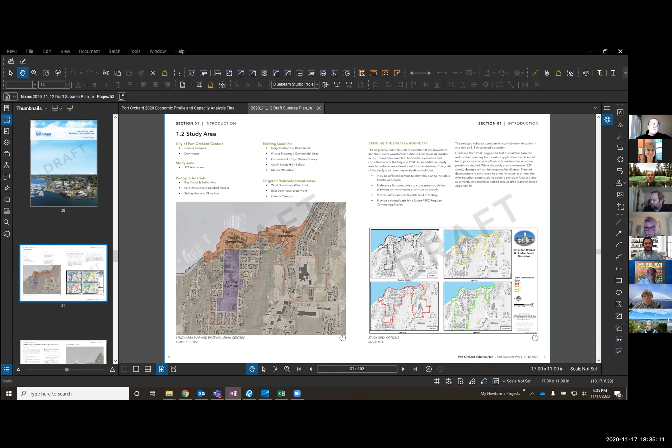And then in consultation with PSRC and city staff, we essentially came up with a few different scenarios that would get us to the area requirements, trying to capture where we thought development might occur and where we might capture the most activity units prior to getting into the full study of the parcels in the land. And that's what you see here, the different study options we considered.

PSRC had recommended that it's best at this point to look at a broader brush stroke to the study area, and that if the city does go in with an application in the future based on the sub-area plan, it's easier to defend a reduction in the study area than try to expand the study area for an application to an area that wasn't studied. So that said, we ended up on the study area.

If you can see this in red here, I'm following with my line. The outline is about 329 acres, and it encompasses the existing county campus and the existing downtown campus. And we'll discuss these other colors a little bit later in the slides.

But what you're seeing down here at the bottom highlighted in red then is the existing population within this larger boundary, about 1,800 residents, almost 2,200 jobs, again, the 329 acres, and the existing activity units is only at 12 in the existing condition.

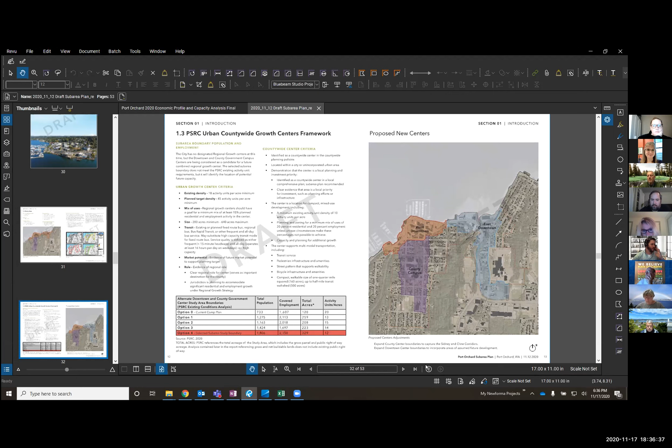So where will the development occur within the sub-area plan was one of the first initial tasks we looked at, and we leaned a lot on this report that was sent out previously, conducted by Heartland. And what we did is we looked at each of the parcels within the area and determined what are the existing gross developable lands, or what's our capacity for development.

And that really looked at primarily three things. What's the vacant land, what's underutilized land, and that was really the ratio of improvement to the land value, looking at assessor's data for the some 780-ish parcels, I believe, in the study area. And then the other is looking at where there are single family homes within larger density

allowable zones. From there, it was adjusted based on critical areas, future anticipated road right-of-ways or driveways, and a small percentage that was assumed just would not be developed within this planning horizon timeline to 2040. From there, we arrived at essentially a square footage of land that was assumed to be our net developable land where that future development may occur.

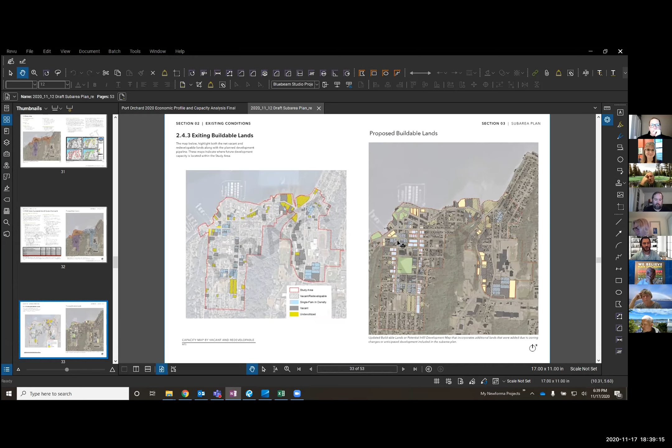So moving on from there, part of the sub-area plan is we are also including a programmatic EIS to look at the environmental impacts of this proposed new development, and the three proposed alternatives that are being considered take more of a programmatic approach to this development. This is due in part to the uncertain scope of future development, and also the large study area of the boundary.

And of the three alternatives being considered, alternative one, the no action alternative, essentially doesn't assume that no development will occur, but rather that development will occur outside of the proposed policies included within the sub-area plan, and that would most likely occur similar to the existing conditions within the study area, largely more single-use development with largely surface parking.

And then the two alternatives being considered are alternative 2, which is a residential focus, which includes a higher percentage of residential and most of the commercial occurring in standalone commercial development with a higher percentage of surface parking than alternative 3. Alternative 3 is assuming a little bit greater structured parking overall, and it's also assuming more mixed-use development within the study area. So, for instance, ground level retail commercial uses with office and residential above.

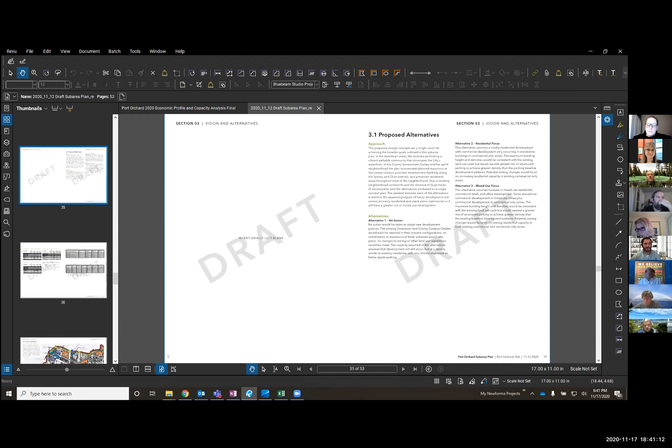So starting out looking at the redevelopment areas, we generally broke them down somewhat based on the existing centers, but also on the buildable lands analysis map and the geographic conditions of the downtown. And so starting out with the west downtown area, some of the big goals that we're proposing for this area are, one, a Bay Street corridor plan to identify proposed frontage design and streetscape standards for future development that would occur along Bay Street within the entirety of the study area from Port Orchard Boulevard through to the end of the West Bay Center. And also recommendations for the existing marquee in the historic downtown area.

Additionally, how can we better activate the waterfront? In many ways, the development right now turns its front face to Bay Street and its back to the waterfront. And how can we propose development patterns that allow the Sinclair Inlet to be more of a front door for the city? And also, how do we better improve connections to the waterfront, including pedestrian connections from Bay Street, uphill neighborhoods, Prospect Street down to the waterfront.

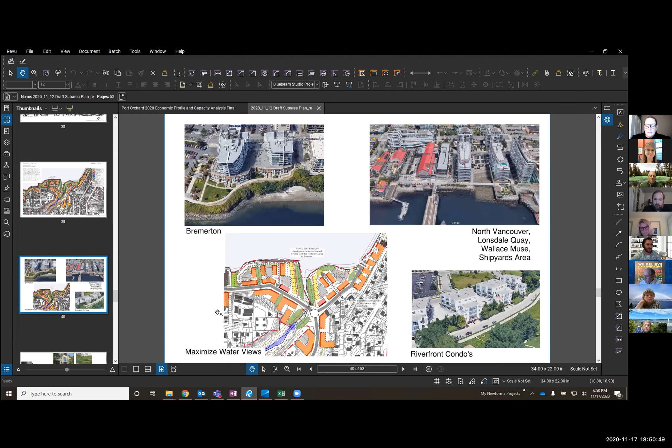And then just some suggested imagery, precedent imagery of what the outfall of Blackjack Creek might look like. Again, looking at potentially more of a natural type landscape with the idea of potential boardwalks along the waterfront, and then in front of the buildings you would have more traditional stoops and building entries that all are anchored looking at that view.

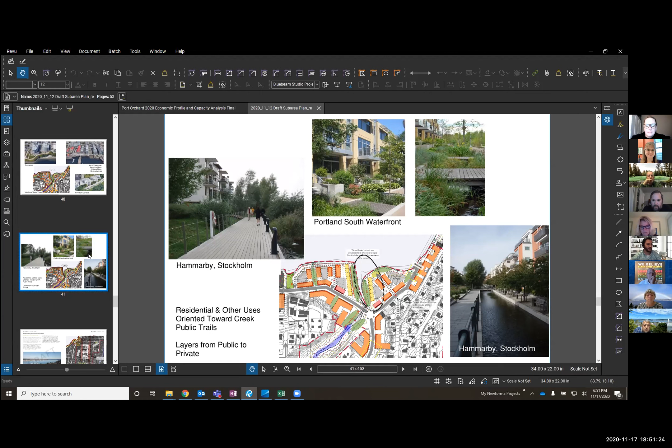For the county government campus, there isn't a lot of land that was included within the capacity analysis in this area. And what we're really striving to do with the goals of the sub-area plan is to support the planned expansion of the county government campus as a strong job center for the area, and then encourage some new development along the Sidney and Cline corridors, consistent with the comp plan, that new development does occur along existing corridors,

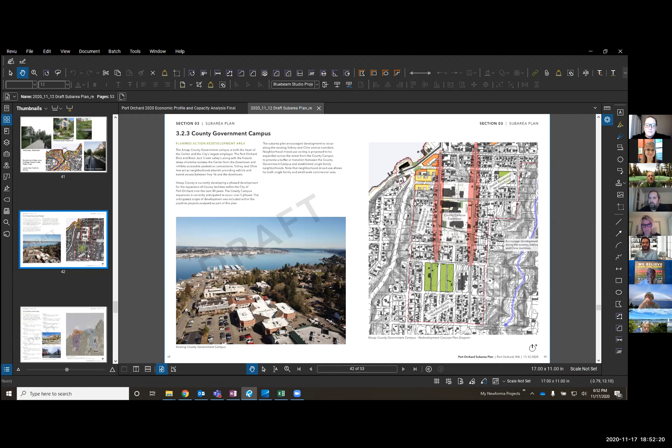but then also have that development act as somewhat of a transition or buffer between the larger scale development at the county campus and the stable single family neighborhoods further to the east and west from there. And really, how do you have new development while also trying to preserve some of those stable single family neighborhoods?

So looking at some of the land use suggestions, first on the right here, this is the proposed adjusted centers map. And so adjusting the county campus center to include more of that proposed developable lands, and also plan not just for the center of the streets, but the way that you actually experience neighborhoods is both sides of the street at once. And so capturing either side of Sidney and Cline Avenue as part of the planned center area.

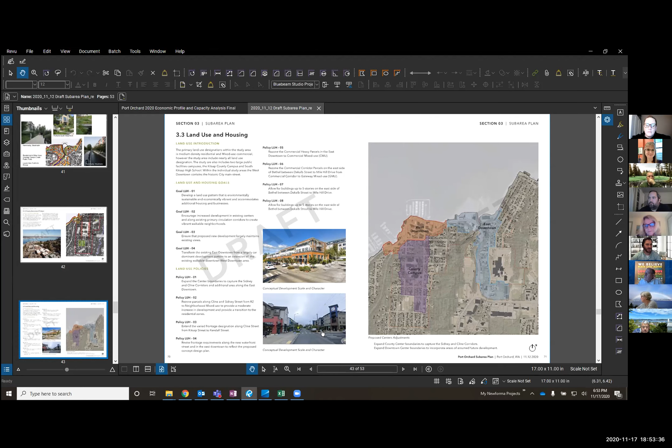And then largely in the east downtown, much of the proposed development lands are along the Bethel corridor and the South Kitsap High School. And so incorporating that portion of the study area within the center as well. And again, you're seeing a couple more precedent images of the scale of proposed development that might be included within the plan.

Suggested frontage revisions, expanding some frontage requirements from the existing land use code, extend from Sidney corridor, which a portion of it doesn't have frontage requirements and a portion of it is landscaped, and allowing for more varied frontage requirements along that entire Sidney corridor. And then a similar case, extending the frontage requirements on Mitchell Street and down to the waterfront, as you see here. The proposed new Loop Street and Waterfront Street in the East Downtown.

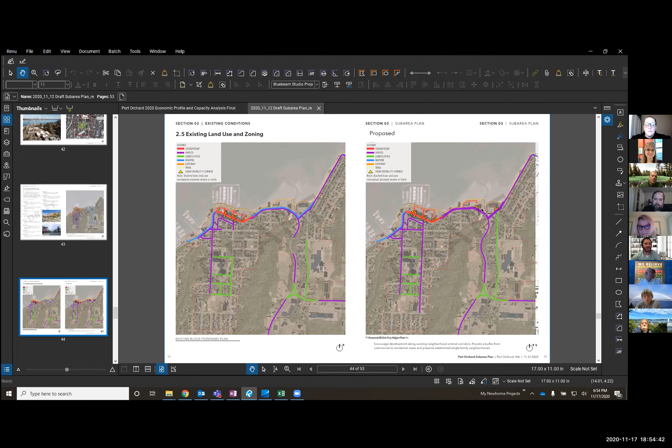And then proposing for Bay Street to have more of the same character of development, going from a marine frontage to a varied frontage along Bay Street, which would require essentially a larger portion of the street frontage to be held by building development.

We did include some minor proposed suggestions to land use changes. And again, that was to reinforce the Cline and Sidney Avenue corridors. And so what you see here dashed, those are the parcels that are suggested for changes to the land use. And so going from, right now there's pockets of neighborhood mixed use along Sidney and Cline, and just going to more strongly reinforce those corridors, proposing neighborhood mixed use along the extents of each side.

And again, neighborhood mixed use still allows for single family zoning, which exists in much of the area, but it also does allow for small scale commercial as well. And that already exists along many of the parcels across from the Kitsap County campus, and wanting for there to be more of a transition from that tall, high scale development of the county government campus, transitioning to the more single family neighborhoods away from Sidney and Cline.

And then at the East Downtown, proposing from heavy commercial to commercial mixed use at the existing Kitsap Ford, and then Gateway mixed use along the Bethel Avenue corridor. In a couple places we've heard from the public a lot of concerns about maintaining existing view corridors to the waterfront and ensuring that development not inhibit those views.

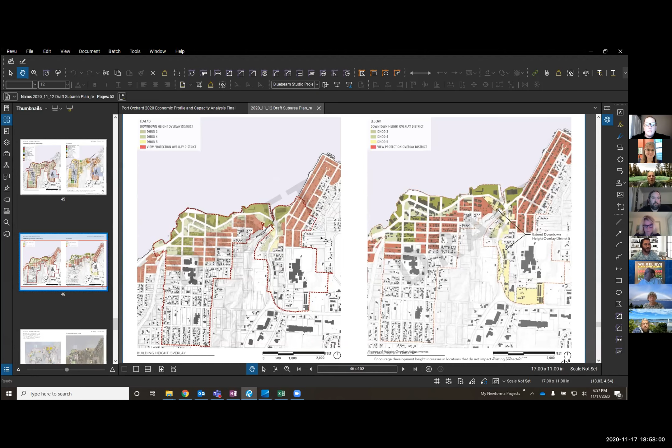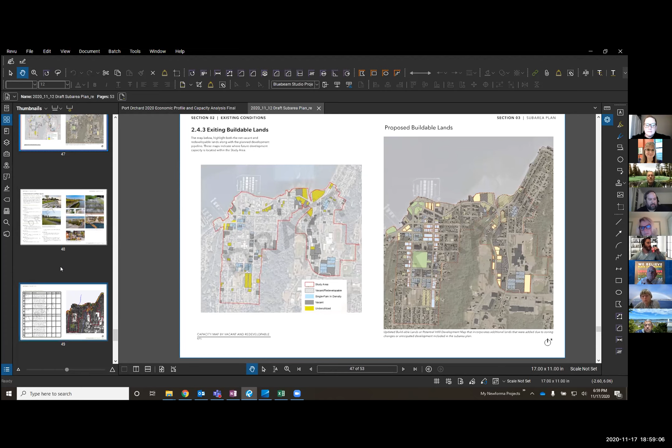About time there, Nick, and thought this would be a good stopping point and allow for questions. Yeah, absolutely. I don't have much to add to Mitch's presentation, but I will let the council members take it away with comments or questions.

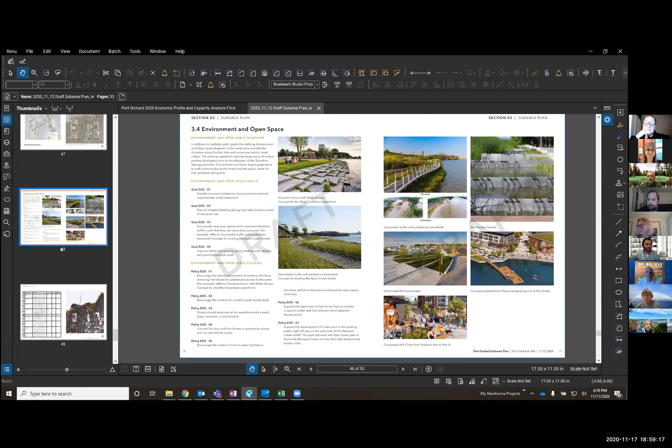Go ahead, folks. Could you turn back to page 71? I don't have a header on. It's, yeah, that map on the right. Yep. Okay, a couple things struck me about this map. I understand the need to, as you say, buffer the height of the county campus buildings against the single family dwellings. I am concerned about the expansion of the county campus area west on Cline and east on Sidney,

because you may not be aware, but that area there that you're suggesting for up development has a lot of the historic homes in town. And so it'd be really ironic if we're protecting the single family houses on the right from the overwhelming architecture of the county. And I think it was this map that also made me realize that the county should not be encroaching on the city so much. They should be an employer. They should not go so far.

And I realize you didn't make the boundaries here. It looks like it stops at Kitsap Street between the Purple and West Downtown. But that boundary gave me a lot of heartburn because that is a prime residential area. I know that property tax is not a concern of everyone because we get more of our revenue from sales tax, but if all that purple area became county grounds, we would be potentially removing property from providing property tax.

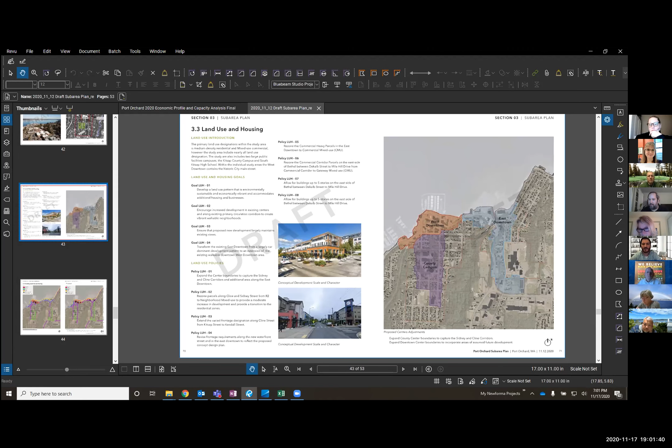And Councilmember Chang, I think that the county campus label we really meant to divide the center into 3 areas based on topography, not based on who's using the land. And so I think this is an issue of we've labeled this county campus, but the county's actual footprint is much smaller than the purple area. We're just calling the area the county campus, and so perhaps we need to call it by a different name.

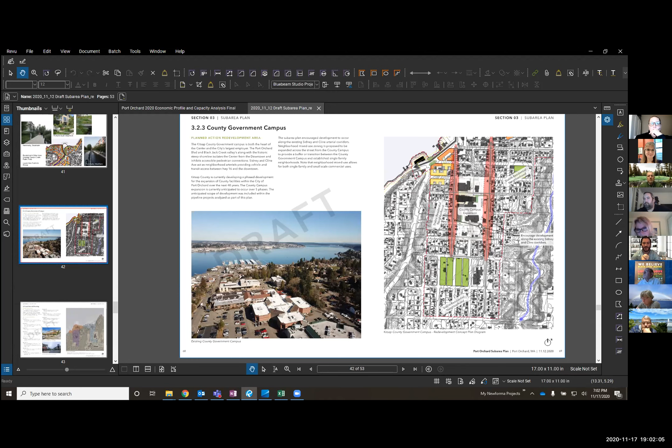Yeah, and some part of that comes from the existing comp plan where I think it's identified as the county government campus center, something along that line. And so the existing county campus is not planned to expand, but rather the study center as identified in the comprehensive plan is expanding, not the actual county campus.

So this is Scott. I would support a second look at how we label that and also how we show what we're currently calling the county campus and how that extends down the hill to the north. And it seems like a better break would be a little further to the south than it's currently shown, like I think Fred is referencing. Maybe Dwight Street, if not Division.

I think Dwight makes sense to separate downtown. Yeah. And also just north of Dwight Street on the corner is I think a parking lot that the county uses. So Dwight Street might be a good logical break.

Councilmember Cucciardi, you had your hand raised. Yeah, Nick, I was just going to go back to your opening comment as it relates to the PSRC. Do you want to just kind of talk about the pros and cons of what that would look like and kind of what you're looking for us to weigh in on?

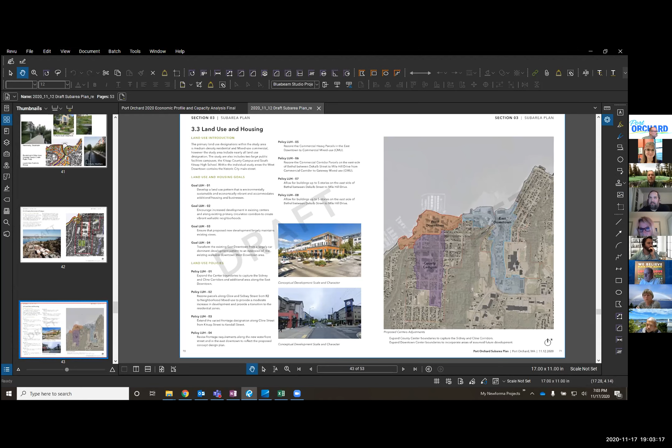Yeah, so I think somewhere in the plan, and it's going to take me a minute to scroll to that page because I'm viewing it in a browser, it talks about the 3 alternatives and what alternative 1, 2, and 3 look like in terms of planned activity units. The highest of the alternatives is alternative 2. I believe it's 26 activity units per acre. And we're currently, depending on where you draw the boundaries, anywhere from 12 to 18 activity units per acre.

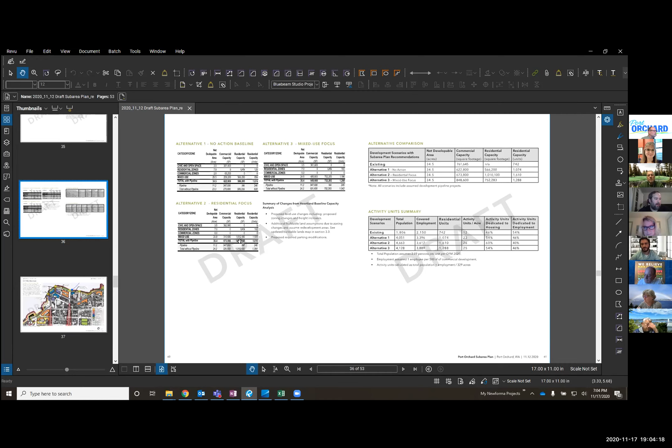So with this plan, what we've realized is a lot of this is redevelopment. There are existing activity units and there's a net increase, but we're not increasing the activity units that significantly. And I believe that we have to plan for 45 activity units per acre over an area that's at least 160 acres. To get there, we would have to either have significantly more height or be upzoning significantly more area or showing some of this redevelopment in more areas of the city.

And based on the comments that I've heard about preserving the existing residential neighborhoods, I just don't know that there's support from the community or from the city council to do that. Right.

Councilmember Ashby. Sorry, I lost some network access for a bit, but I believe this is the table you're referring to, Nick. As you see here, each of the alternatives, we're looking in the range of planned activity units more in the mid-20s. So it's a significant jump to get to that 45 activity unit number. In our discussions with Nick and city staff, it seems as though there's not public support to go to the type and scale of development that would be required to get that. Seems like a non-starter.

Yeah, right. And to elaborate on that, go ahead. What I would add is I don't see a need to become a regional center. One of the conversations with that is that we would be more likely to get regional transportation funding, and I do not think that that would happen. I think designating this as a countywide center is appropriate for us.

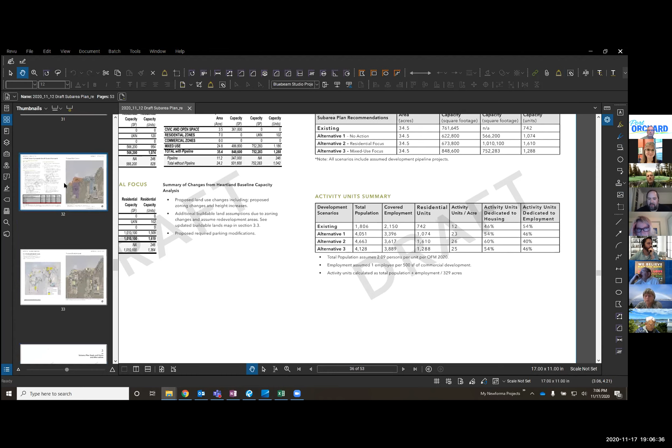Right. And so what I was going to add to that is PSRC has a minimum existing activity unit number to be considered as a regional center, as well as a planning target. When we were considering, we're close to meeting the existing number. It's showing right now that it's 12 units per acre, but that's because we've expanded the boundary so much to include up Mitchell towards the high school. When we originally measured, we were closer to 18 activity units per acre, so we were seen as being close to the intensity to meet the standards.

But once you add the planning targets to that, it really transforms Port Orchard. And I think that's probably something that we don't have support for at this time. Nope. Yeah, I don't like this.

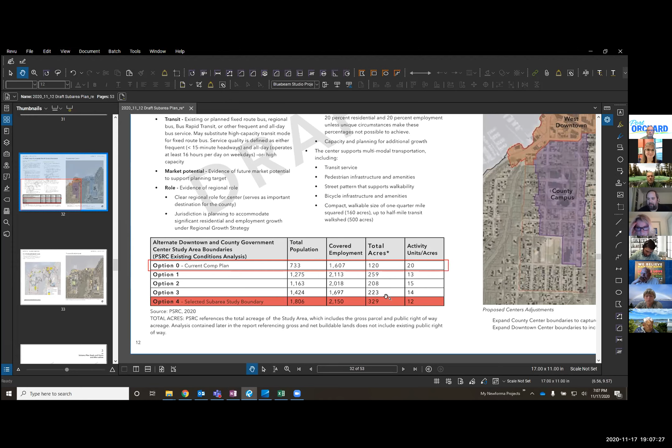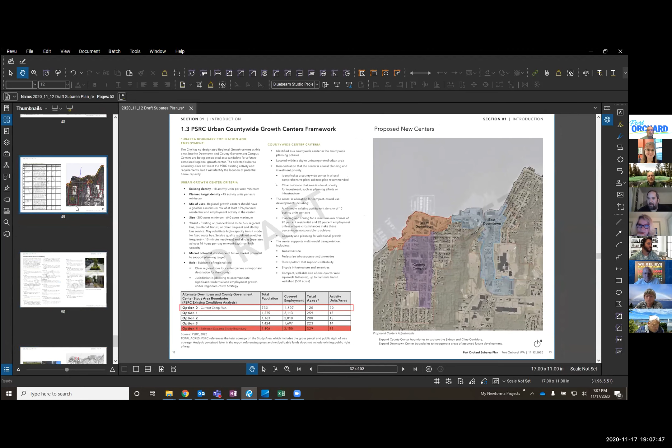So one other thing I wanted to mention in terms of implementation: Mitch touched on some zoning changes along Bethel to allow a little bit more height in those areas. But another thing is we're updating the parks plan at this time, and we've identified plazas at every street that terminates in the water, trying to transform them into more of a pedestrian space and providing access to the waterfront. If council is supportive of that idea, I need to make sure that I'm building those projects into our park impact fee, so new development is actually helping to pay for some of the redevelopment of the waterfront downtown.

And likewise, the transportation projects, we're talking about block frontages and doing some non-motorized improvements on Bay Street. We're going to have to do this next year, but it can't be part of our traffic impact fee now. I think we should consider putting some of the transportation pieces of this into the city's traffic impact fee, so that it can also help fund some of this as development is occurring. So I want to make sure that council is comfortable with that as an implementation step once we get this plan adopted.

So if we don't care for some of these boundaries, are they going to be adjusted in the plan? Or where are we at with this right now? You're asking us to decide on these options. What if we don't like any of them?

Well, so where we're at right now is this is a preliminary draft plan. So we are going to be releasing this to the public and doing some additional outreach. And there's going to be a hearing, I think, on the plan, or at least an opportunity for public participation in January. Is that right, Mitch? I don't have my schedule in front of me. And so there is absolutely an opportunity to make changes.

But when we talk about the alternatives, are we really going with more of a balanced approach where there's additional employers and commercial jobs space created in Port Orchard, or are we leaning more towards residential development to help bring the critical mass of people downtown to support a thriving commercial district 7 days a week? And so the alternatives that we're looking at are really, are we aiming for this balanced mixed use approach, or are we looking at a residential focus?

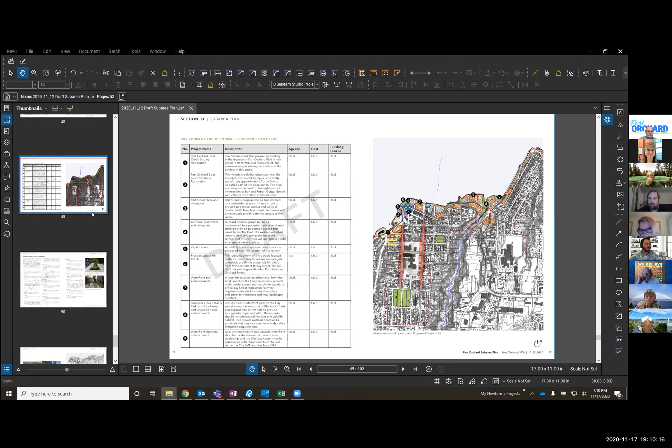And really changing our downtown so that you can actually sit on the sidewalk in front of a business and eat outside on the water side of a building is a transformational change that I think we're probably closer to the mark in that west downtown area compared to the other areas, which are much more conceptual right now. Mhm.

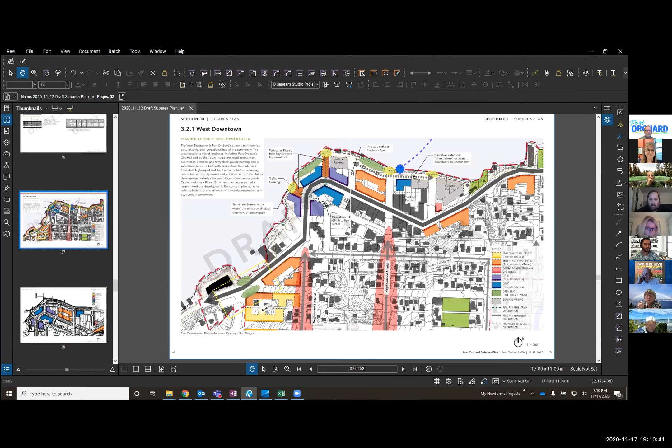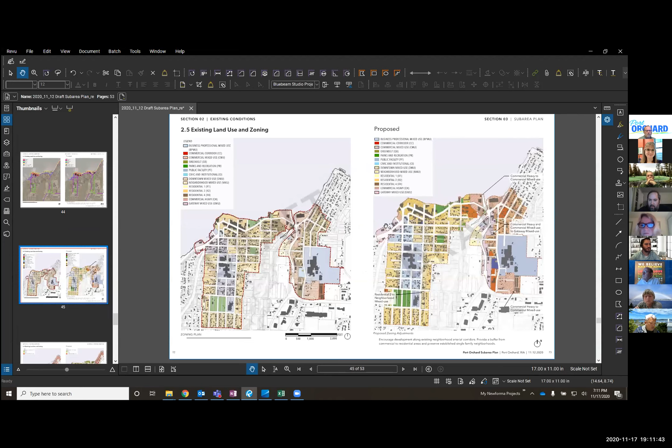So it's mainly the Bethel corridor where he's got these cross-hatched areas where we've got some commercial heavy where the gas station is and where the car dealership is, and we're proposing to change those. And by the way, we have met with Mr. Titus about this, and he said point blank he totally understands that the highest and best use of that property is not for selling automobiles, and that he's interested in moving to another. So he's supportive of the zoning changes in that part of downtown.

Thank you. The other piece of this that I think is potentially going to be really a hot button issue with the public is parking, as it always is. And so with that development between Harrison and Frederick Street, some of the existing parking where we currently have 2 rows is going to become more of a street with 1 row of diagonal and then a row of parallel parking.

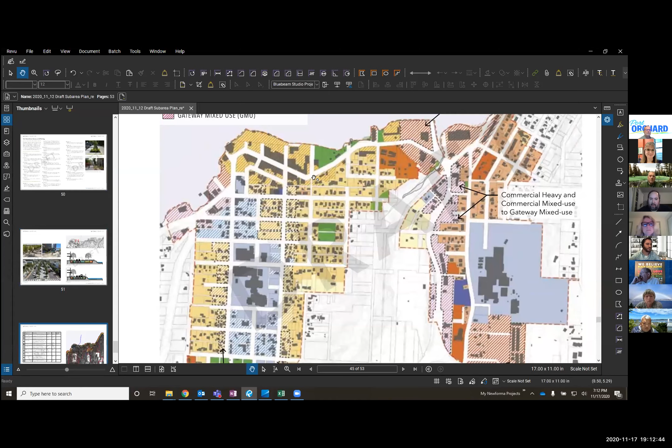And that's partially offset by the proposed structured parking at the site where the stair climb is across from City Hall. But it's also, I think, part of the mitigation has to do with Kitsap Transit and the existing more long-term parking for all-day parking would be available for a different type of parking. And so I think that's part of this conversation, and the timing of how those changes actually occur is really going to depend on the pace of development and also the presence of new park and ride facilities elsewhere in the city.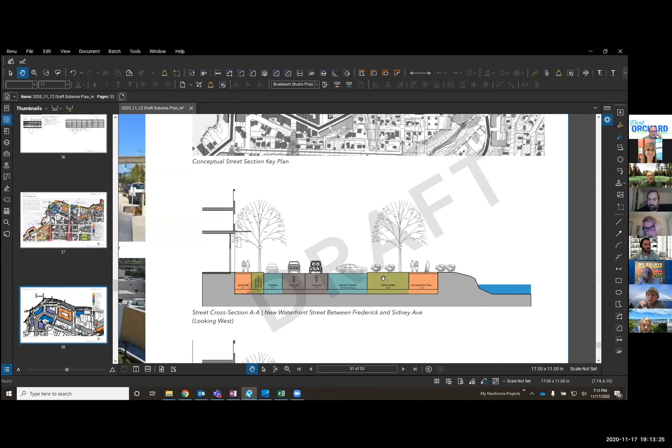A question I have is not the west side of town, but we've had several studies before, several plans. But on the west side of town, with the map that's up right now, we know that there's a potential for implementation of this on that section. When we go to the east side of town, we're completely offering an idea that the Titus site would be used completely differently than it is now, and also the West Bay Shopping Center site. So my question is, do we really feel that there will be movement in those areas? I mean, do we believe that the plan will actually be implemented?

Well, I would answer that, I guess, in 2 parts. First of all, the proposed planned action EIS is going to complete the environmental review for the first, I'm not sure whether it's 1,200 units of housing and 500,000 square feet of commercial space, but we're going to pre-approve under SEPA a certain level of development. And so it's going to be available on a first come, first served basis.

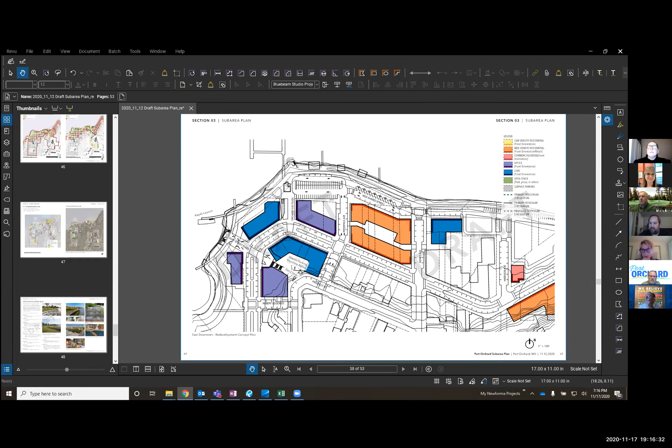I think I would just add one more point to your earlier comment about the east area downtown. There are a couple parcels, I'm forgetting the name of the parcel off the top of my head, but across from the gas station. 100 Bethel. Yeah, so that's a property that is potential for development in the near term. But the other point here is just to reframe all of ourselves that we're talking about analyzing this to a 2040 horizon. The redevelopment would be in the next 20 years.

So I was going to say at this point in time, I was wondering if there's other comments from the council members, and then Nick, I was going to let you summarize and say what are the next steps. Well, I'll answer Scott's question first. It's a little over half an acre that we lease to Titus. And that's not including the easement that we have or the portion that's occupied by the trail.

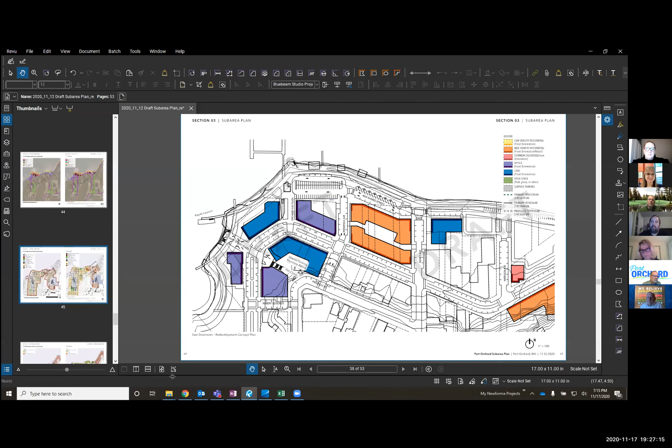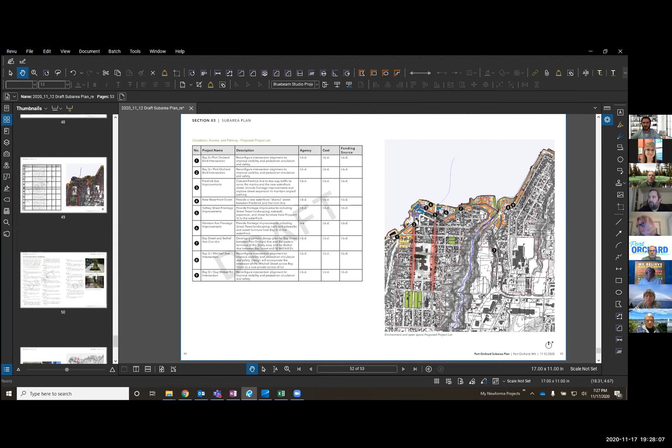That's what the council would like. Absolutely. I think I would like that. And I also want to make sure that we can, I know we may be stuck with this process for a while, and who knows when we'll be able to return to normal life, but I do share concerns about making sure this is as robust a public process as possible.

All right. Any further comments? Councilmember Clausen. Yeah, just a couple. One is, I think, having a list of comments, regardless of where they originated, would be helpful. And secondly, I totally agree that we need to take the extra steps to make sure that the community is aware of what we're doing. So if we

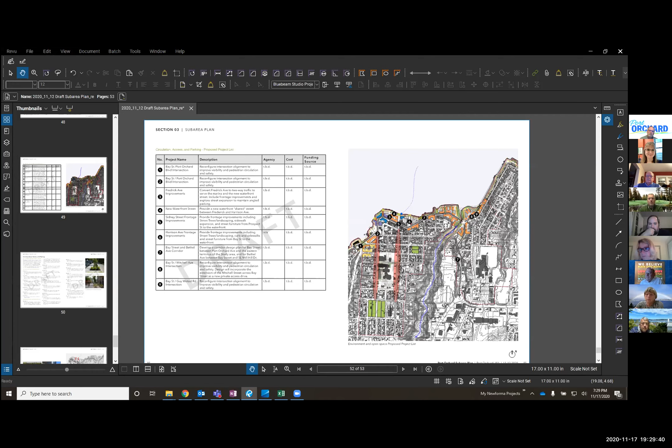John, I agree with that. And I think it maybe should even be a broader range than just the affected properties downtown, because this is our downtown core. And I believe it impacts all of the city of Port Orchard, if not South Kitsap. I'm wondering how we can tap into the same networks that the library has. Or the group, I can't remember their name now, that's doing the outreach for the community center activity, because they seem to have gotten a good response. So how could we possibly tap into that network?

How much time will you be doing this? I think this will be on the work study agenda for January. And then I would imagine, I can't remember if the public meeting, I don't have the calendar in front of me. Into the new year, correct?

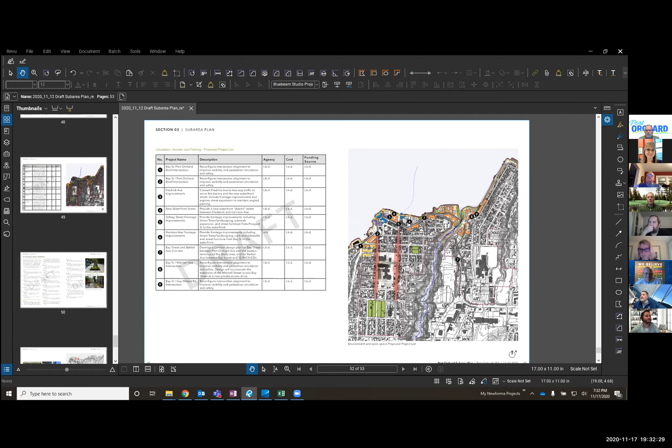And the next topic is stormwater presentation. Mr. Dorsey. Yes, I guess Zach, we did a presentation to the utility committee last month. I think Zach's gonna try to get us back on track a little bit by ramping through. So if we could hold questions until the end, that would be awesome. So Zach, are you driving at this point?

Yeah, I'm attempting to see if I can share my screen here. Who's giving you authority? Excellent question. Is Brandy giving you authority? Yes, I just gave it to him. Okay, let's see. Right.

Our original permit was issued in 2009, and every iteration that we've received has had some changes over time. For the one that was issued in 2019, this is a summary of the upcoming stuff that we're working on currently. Our code evaluation updates for construction site runoff should be done and completed by the end of this year. The code sections are in process of evaluation as well. Minor comments have been identified so far.

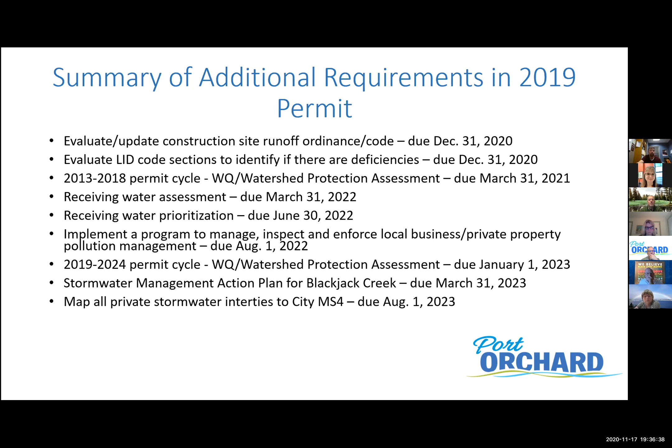So I'm going to talk a little bit about what we've done in 2020 for maintenance and other activities required by the permit. So in 2020, we have currently cleaned 952 swales within the city. Of these, 16 of them required maintenance. We successfully maintained and updated as needed 324 feet of ditch lines.

Normal operations this year were kind of thrown into turmoil because of this whole coronavirus. So instead of hiring private contractors to come in and do our catch basin maintenance, we actually employed city staff to do it ourselves in-house. During our maintenance and inspection cycles for 2020, we identified 12 catch basins that were in need of repair, and 3 ponds were found in need of minor repairs. In 2020, nothing showed a significant need of repair.

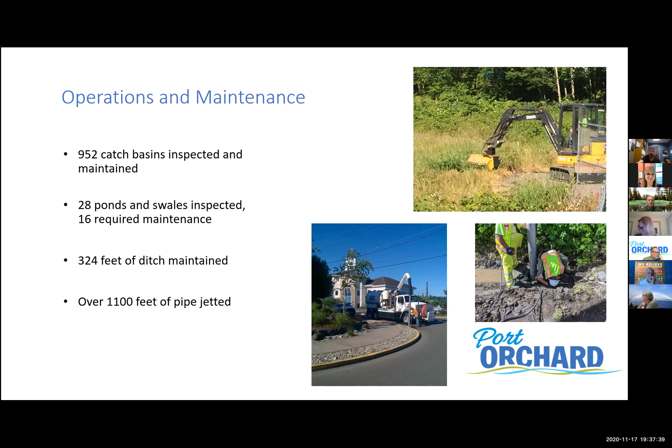I'm going to move on to our construction inspection program. In 2020, as of September, we have inspected 554 sites for different varying permit-related activities, either land disturbing or utility and erosion related. The implementation of our drone program has significantly increased our efficiencies with inspections and reporting for enforcement purposes.

Of 136 permitted active development projects in 2020, 15 were land disturbing permits and 121 were building or utility permits. Of these, we have only had 2 with compliance issues in 2020.

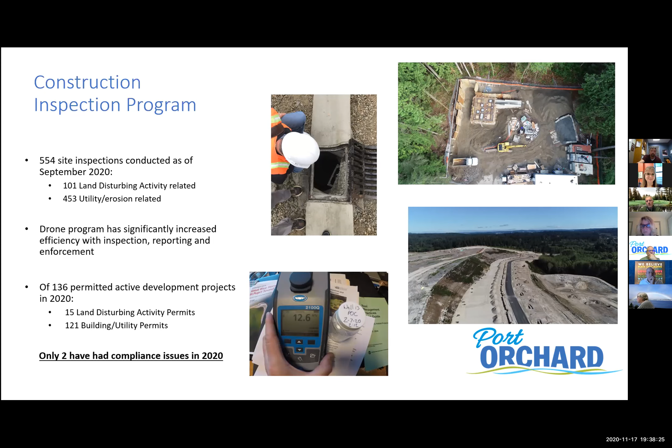For our illicit connection investigation and illicit discharge detection and elimination program, plus our spill response program, we are currently in compliance for 2020 with all of our outfall and illicit connection screening program requirements. We have continued staff training for identifying IDDEs and basically how to triage the situation. Usually it results in a call to staff depending upon the level of importance or effect.

We've quickly located and managed local and multi-jurisdictional spill response efforts. Within 2020, we had less than 35 combined reports so far. We still have some time until the end of the year though. We will be upgrading to our new illicit connection and illicit discharge detection and elimination manual in 2021. Fairly minor changes from the previous, but still changes that we plan to incorporate.

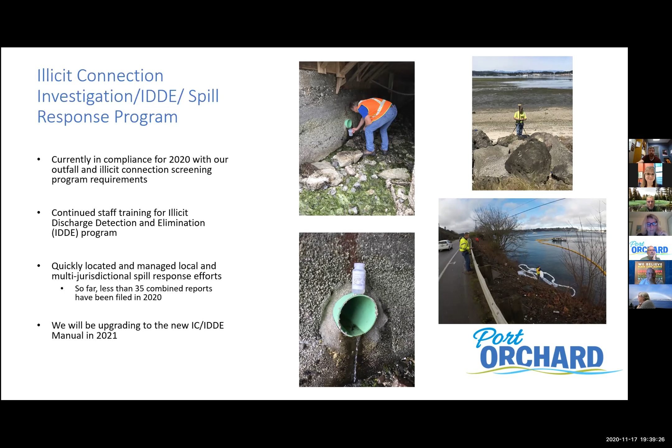For our mapping and features inventory component, we continue updating our GIS database with new assets as development continues, and to update features data, pipe size, materials, conditions, etc. every time we do an inspection on these sites. So anytime we're peeking into these things, we're checking on this schedule.

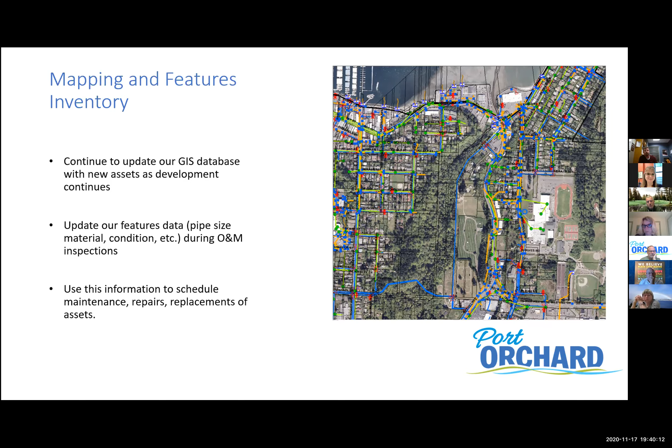By this permit, our plan that we submit every year is an updated report to Ecology, which outlines our compliance plans for the upcoming year. So when we submit this in March, it will be for 2021. This differs a little from a comprehensive plan, which is a planning document that is periodically updated. And I'll talk a little bit more about the Stormwater Comprehensive Plan soon.

Here gets away from being reactive and it focuses on evaluating and testing the system condition by developing a rating for each asset that we inspect and then setting a schedule based on the age or condition of that asset. Our new TV truck and our new Vactor have really been helpful for us. We've really been able to holistically inspect, troubleshoot, and diagnose problems or needs in this system. Many of these are underground that we previously weren't able to really track down and identify. The camera truck has really helped us with that.

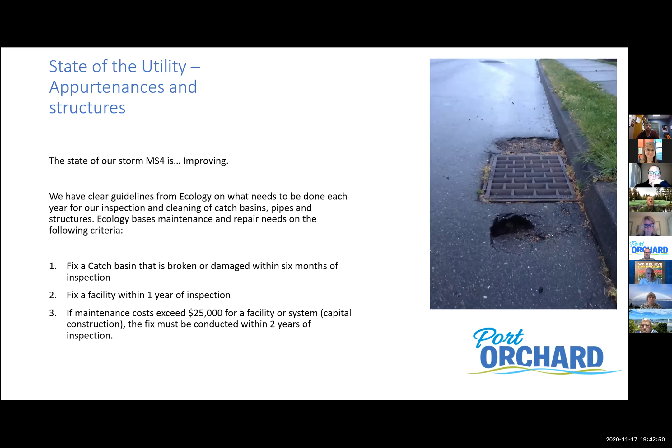As the city moves towards an integrated asset management program, all of this information will assist our staff in making informed decisions about prioritizing needed projects. Surface water management component. So many of the issues within the city arise from rain events and stormwater runoff that aren't necessarily associated with brick and mortar type utilities.

The 3 that we completed in 2020 were the pedestrian pathway bridge repair at McCormick, which is scheduled to be done in a couple weeks here once we get the materials on staff. Horstman Heights is another one that we're backlogged for materials on, but it will be completed before the end of the year. And the Bay Street pedestrian pathway repair down near the high tide? I always say it wrong. Across the street from the Blue Goose downtown there, right along the pathway right near where it ends. Our crews were able to repair some damage due to stormwater and tidal influences that occurred there.

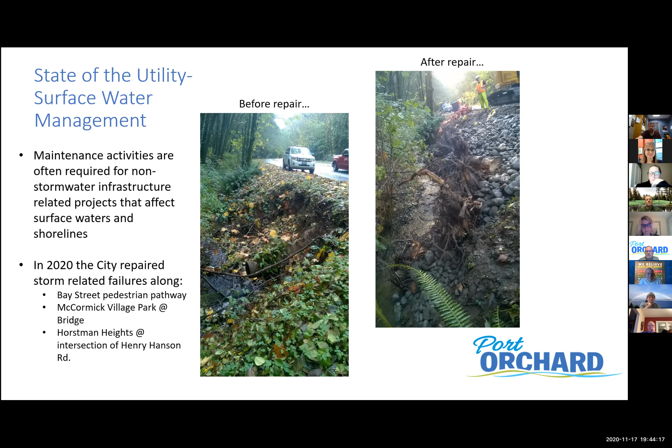So on to our dam safety program. The McCormick Ridge Dam was inherited by the city in 2009 from Kitsap County. We have 3 registered dams with the Department of Ecology within city limits, but McCormick Ridge is the only one that is publicly owned. The McCormick Ridge Dam is classified as a high hazard dam due to the location of a Bremerton housing development downstream of the spillway. The city conducts annual inspections of this site and maintains the dam as required by the Dam Safety Office of Ecology.

We needed to conduct engineering and survey work on this facility because the dam was identified with some updates that were needed beyond the capacity of city staff, such as geotechnical assessments, et cetera, due to this change in the categorization of the dam. So we've contracted with Goldsmith to conduct the work needed to assess and update the dam safety program that we have in place currently for McCormick Ridge Dam. There are some minor repairs that need to be conducted, but these repairs can be conducted by city staff for minimal dollars.